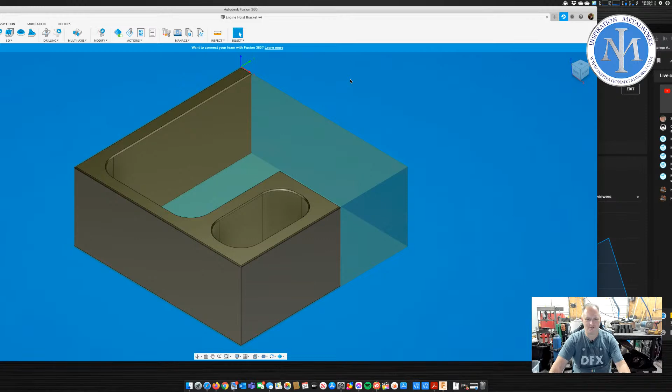So yeah, I designed the part really simple, a little bit stronger. You know, I'm watching for those fracture points. I'm watching for those stress points. The challenge that I'm thinking about here is how am I going to hold this part, because it's 3.75 inches. So the stock is 3.75 inches square, right? And it's 1.5 inches tall.

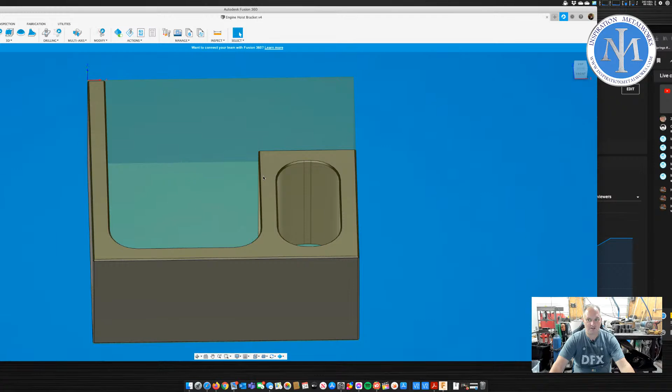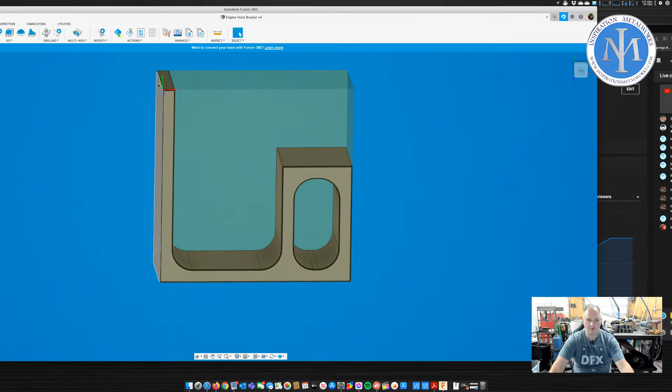So the stock, I made a mistake when I got the stock. I wasn't exactly sure what size I was doing, and so I got a couple of pieces that are exactly 1.5 inches. Yeah, so I was thinking about it like this. But then I've got a very long, unsupported piece of material that I'd be cutting into, and I'm concerned that the harmonics on this would get really ugly.

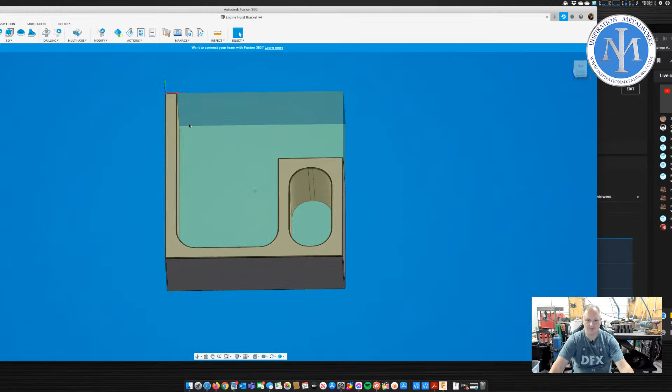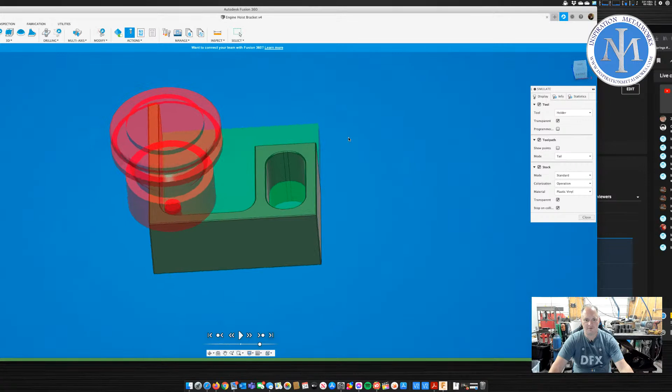So I'm half thinking about, and actually you can see how I've got it set up here, I'm not going to go all the way down. Actually, why don't I just, here we'll do our simulation, I'll just jump to the end. So I'm thinking about going down about 1 inch, so it's 1.5 inches overall. And then flip it over with soft jaws so that I've got some pressure against here.

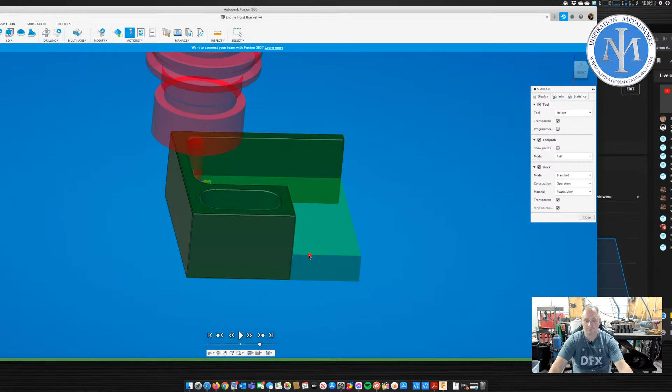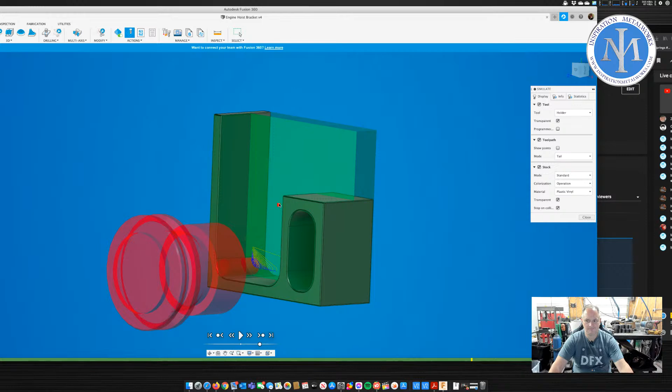Tabbing. I don't know, because that's a lot of material to take off. Long tab vertical. Yeah, maybe. So you're thinking, Craig, you're thinking upright. So go upright, halfway, tab it somewhere here. Yeah, so right now the idea, and I'll have to think about that, and Craig, I might give you a call tomorrow because I want to get this one off my plate and get it out of here.

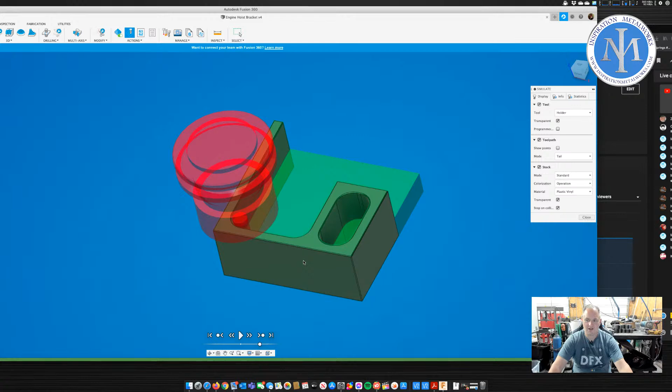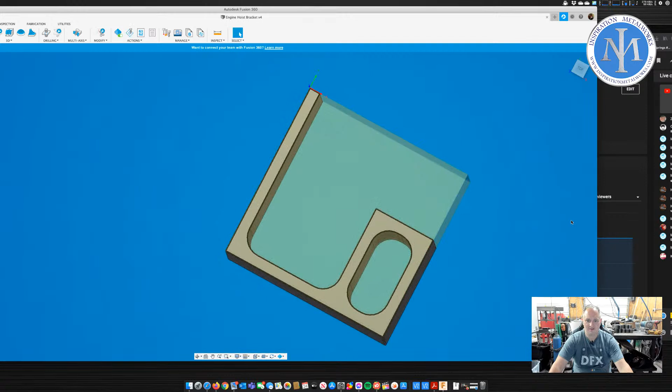Yeah, I'm just trying to see. I'm not really sure what I'm going to do on that one. It's kind of a weird one. Like, I wish that if I had a bandsaw, I would probably take so much of this out just in the bandsaw, right? And then not have to worry about it, because then it's just clean up stuff. But I don't have a bandsaw to do that. I thought about coming this way and coming to this surface and taking all this stuff out. So I don't know.

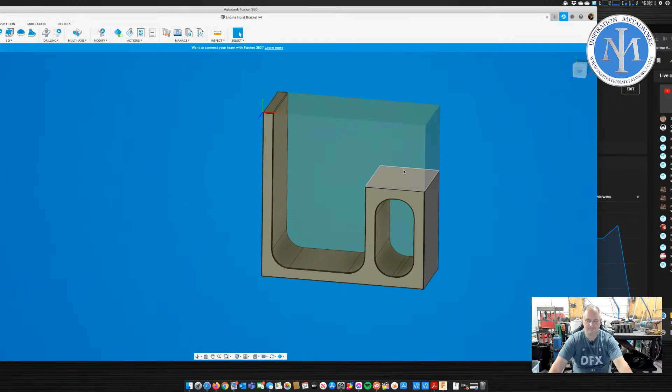Not really sure. So I'm kind of playing around with ideas on how I want to do this. Right now, the idea is like this: take it down a little more than halfway, flip it in soft jaws so that it's holding this wall here stable, pressure against this side as well, and then take the rest of it out. At least that's the general idea. I could leave tabs though.

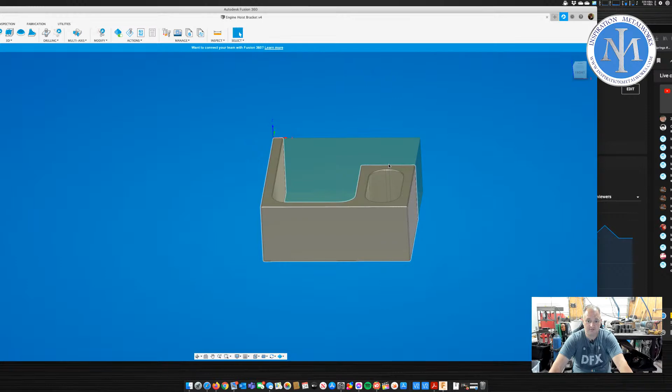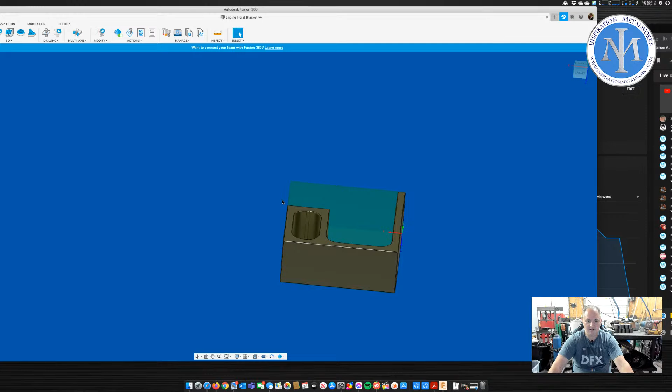I suppose if we flipped it, rather than milling all this out, I could do it as a slot, come around, tab it, and just come through to remove the rest of that. I don't know. This is kind of a tough one. Yeah, we'll have to see. So yeah, that was what I was thinking about. But overall, let me get back to my control panel here. Yeah, I'm not really sure the approach I'm going to take on that.

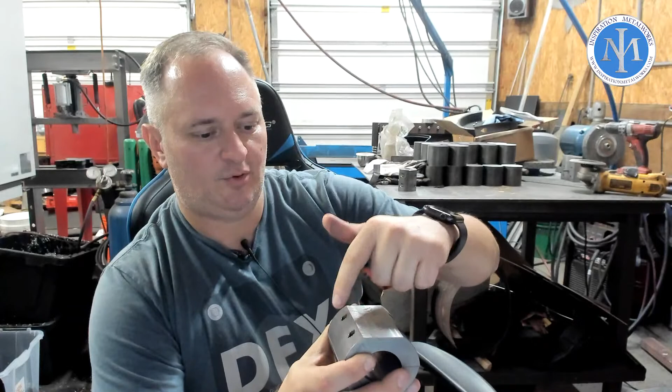And actually, I've made a design change since these were leftovers from the last batch. I put a flat on this side as well, so that I can just drop them into the vise without needing to indicate anything. It really helps speed the process up. But basically, it goes in the lathe, gets the bore done, which is 40 millimeters. Comes over to the mill. We get the flat put on, and then I counterbore where the exits for the drill go, so that when the drill is coming out, I don't get a weird pressure on the curve, right?

Because that will actually cause problems. If you're drilling through something that's round, when you're coming out of it, it's going to want to push funny, because it's the web and the cutting edge is coming in and out of the material. So we flip it over, and again, we've got the design change.

So I put a flat on here, and then I bore the counterbores for all of these, and then I come in, drill a clearance hole, and then tap all the way through. The fun part is it's a 40 millimeter diameter hole that needs to have a 10 millimeter crush dimension on there. So I have to take 10 millimeters out of this round part.

What I found is the fastest way is I've got a fixture that I bolt this thing to. I take it over to the saw over here, and I just slice it in half. Then from there, I've got the two vises and the Brother, and I can put them in the two vises, and I bring it down to size, and then do all my chamfers on it.

You guys may have seen, if you follow me on social media, I put a couple of videos up recently, I think it was last week, maybe a week and a half ago, of testing out a new method of running these parts. I actually went to a high-speed machining method, cutting dry at that. I was cutting at 200 inches a minute and just ripping through. My overall cycle times on these parts are 1/3 what they were a month ago.